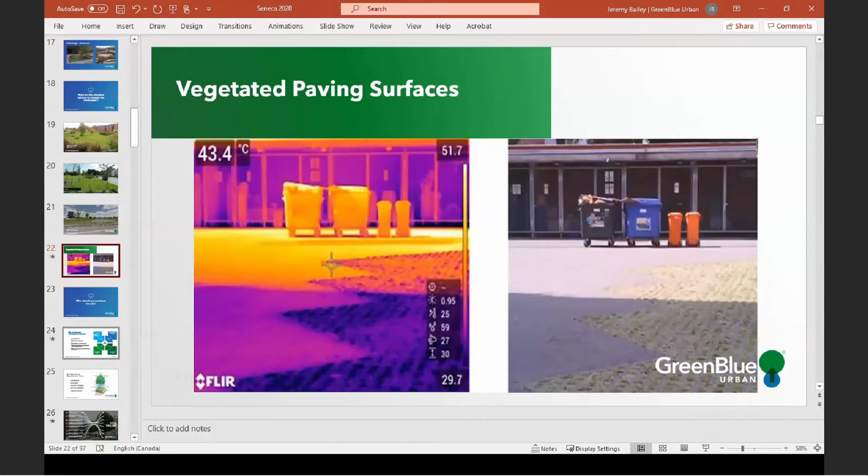Now, people will ask me the question, why should we use a tree for low-impact development, for LID? What does this actually mean? We actually bring it into the 4 pillars. We look at what those pillars actually mean. So we look at water quantity, the investment of it, how we control it, and how we control runoff.

We look at water quality. We look at how we can reduce pollution and volumes. We look at amenity space, how we create and sustain better places for people. That's us. We look at biodiversity, creating and sustaining better places for ourselves and nature. And somebody told me once, as we look after nature, we look after ourselves.

And this is critical. So we start understanding really what a tree can do for us. We look at it as what we call a high-performance tree. Now, the tree in itself might have the benefits of transpiration, canopy interception, reduced throughfall, increased infiltration, phytoremediation. There's all these different benefits that come along with the tree in itself. But we want to look outside of that scope and really understand what it does for us.

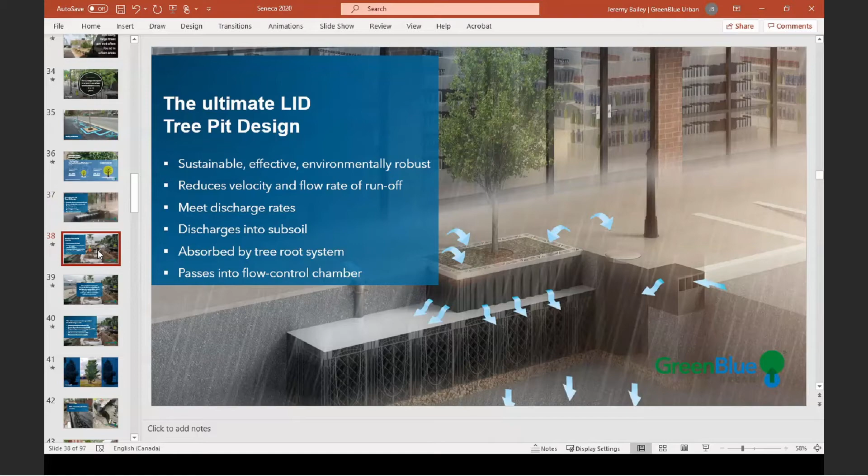Now I want to show you a simple project done well over 10 years ago that actually spearheaded the design of these systems. This is a project at Dundee University in the UK, called SuDS - Sustainable Urban Drainage within a tree pit. We're going to take a fairly small soil volume, just over 13 cubic meters, for this tree.

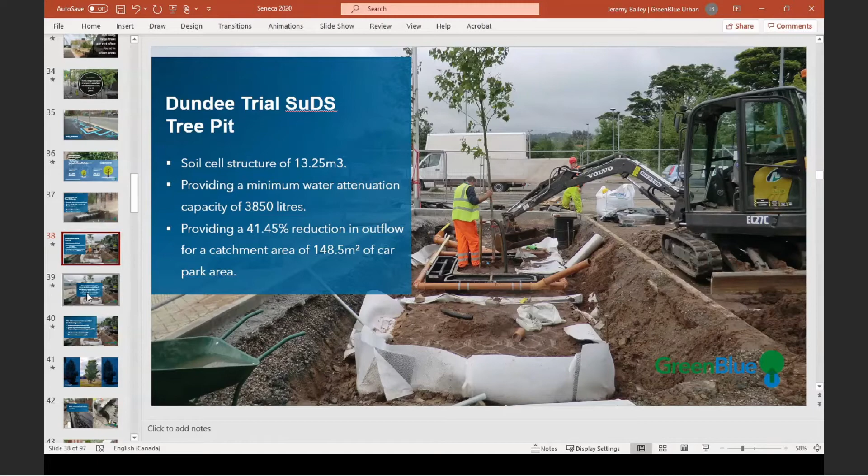Now let's jump ahead and look at some of the values. The results measured a demonstrated reduction in outflow of 88%, with a lag time of 45 minutes between inflow and initial outflow. So if we have a rainfall event at 2 o'clock, it wasn't until 45 minutes later that water came out the base of this. We can reduce the buffer, reduce the pressure and loading on our storm sewers and sewage treatment plants.

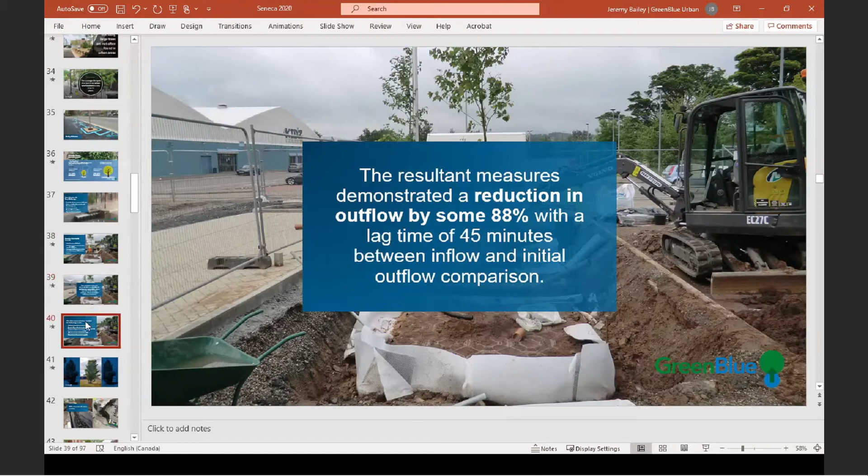Then look at the other values that come along with this. Total suspended solids - the waste we see on the top surface - was reduced by 50%, meaning less pollution going into the storm sewer. Phosphate, zinc, and lead were reduced by 70%. Nitrogen and copper were reduced by approximately 50%, and so on - so we're reducing hydrocarbons as well within this space.

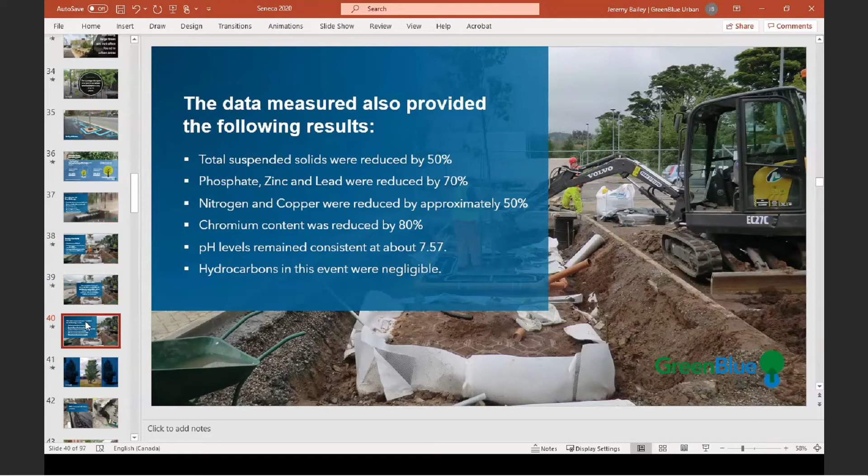Now what I'd really like to show you is what the tree looks like 10 years later. Here's our tree in the same space, performing as a high-performance tree - reducing stormwater, reducing loading on the storm system, and increasing its value as a high-performance tree.

It's providing shade, it's providing value, it's providing amenity space, and it's growing as a living asset in our space. So what I'd like to also do is help you understand how we could design some of these spaces.

I'd like to go through a simple project where we remove microplastics. Below ground, we put in an infrastructure system supporting root growth, what we classify as a soil cell, and ran the water through it. 98% removal of plastics happened on this project. Now here we have the actual project from the surface.

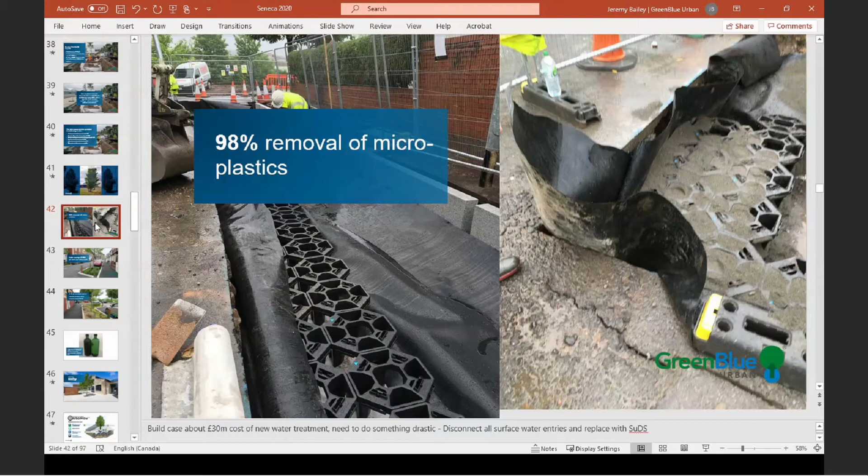People say to me, oh Jeremy, you're saving the whales, you're saving the oceans. Yes, we are. We're reducing plastic, we're reducing microplastics, but we're also creating spaces above ground for healthy habitat of pedestrians and animals. On top of this, the water savings for this city was over $750,000 per year in pumping costs, from the reduced loading on the storm sewer.

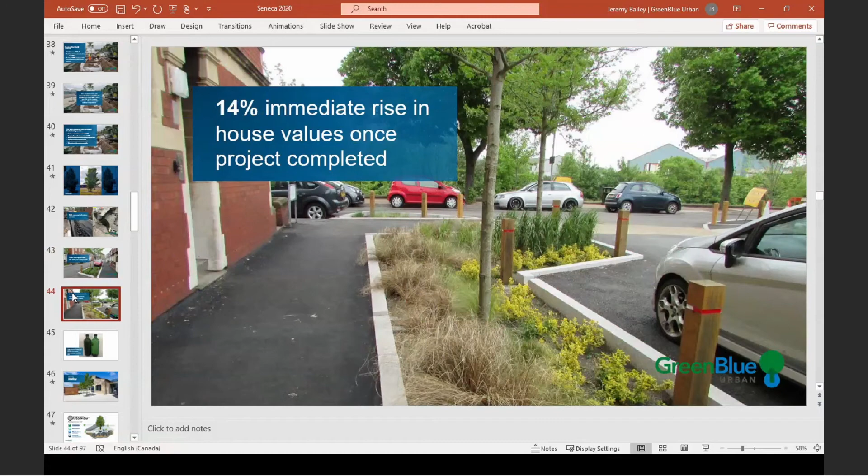Now we look at the value here as well, and we got a 14% immediate rise in house values once the project was completed. So there's a balance to the owners, the pedestrians, and the actual economy within that space. When we revitalize a streetscape and put in green infrastructure as well as blue infrastructure, we get increased residential house prices.

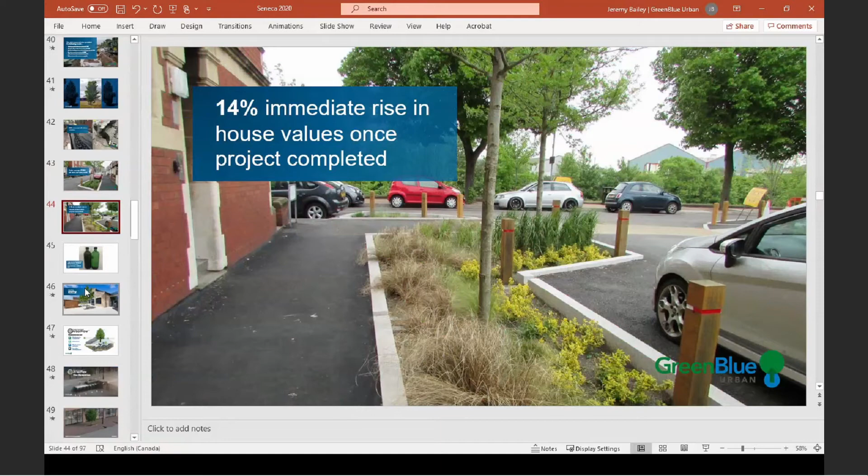Now just looking forward, this isn't just about residential. Here's a very simplistic project. We can see there are 3 trees in front of this building, and around the squares below the tree we can see some gray area, especially in the first tree there - that's what we classify as a linear drain. What we're doing is sloping the direction of the surface into the tree planting zone to allow for stormwater infiltration.

What we can't see here is what's actually happening below ground. Below ground we have a full infrastructure system supporting the growth of these trees, but also reducing stormwater runoff. This is called the ArborFlow system for managing stormwater runoff. Step 1, the water flows into the storm inlet, which can come in different configurations. Step 2, the debris is filtered out - that could be total suspended solids as well as larger debris. Step 3, the water flows through the system and is vented. Step 4, the water enters the system and percolates into the root system.

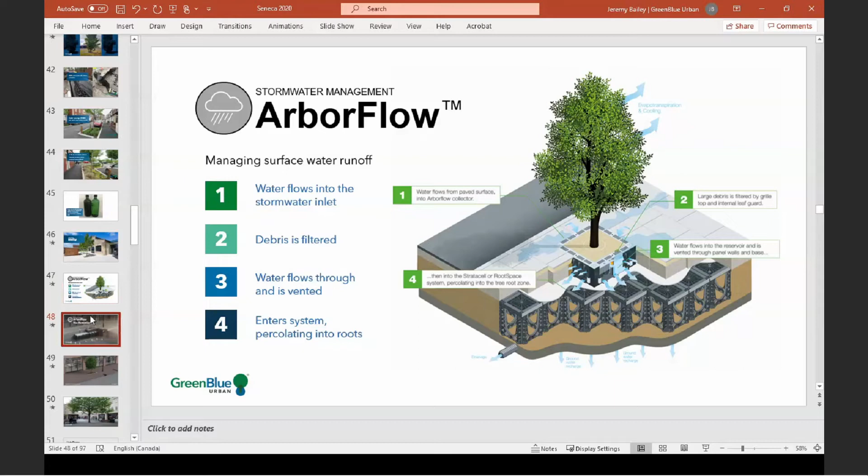Now I'd like to show you how this actually works below ground. Let me just see if this slideshow works here. Okay, I'll do it verbally instead of the video. So what we have here is a permeable surface.

You can see it's raining in this application. We've done a cutaway of the RootSpace system below ground, so there are different ways of bringing stormwater in. Number 1, we can bring it in through a pervious surface, which is great for infiltrating and maximizing stormwater exactly where the rain falls. Number 2, we can use a linear drain on the back of the curb around the tree planting zone to allow infiltration within those same zones. Number 3, we can bring it in from a curb inlet, which is becoming very popular in these spaces. Or number 4, we could bring it in through an area drain and infiltrate into the tree planting zone. The key thing is we provide the infrastructure below ground to create this sustainable environment.

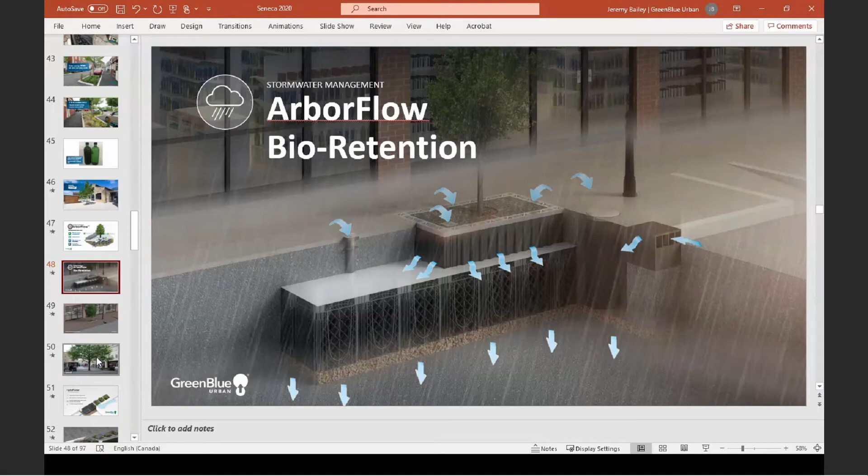So moving forward, we can also use other aspects. I don't want to just highlight trees. We can also use something like hydroplanters or rain gardens. We're actually infiltrating at ground level.

Now we talk about the application of diversity, recycled content, and the right tree in the right place. But we want to also understand how we use the application of recycled components, making sure we're using them in the right way, and being able to remove millions and millions of pounds of plastics from landfill sites and reuse them in green infrastructure and blue infrastructure applications as part of the circular economy of bringing these spaces together.

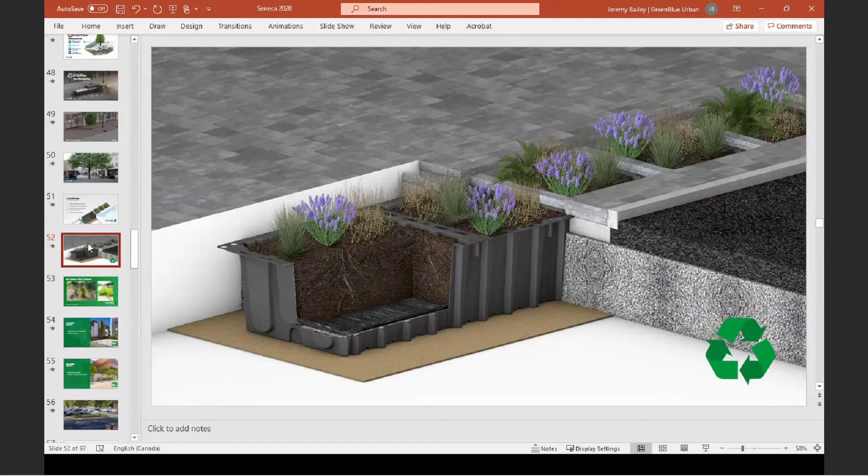So we want to understand when we create these spaces, are we using products like concrete that have very high carbon footprint? Are we looking at reducing carbon footprint? Are we looking at what sustainable infrastructure actually means?

Another way of doing this is actually through green wall systems. These have been used in the past. Of course, in our climate here in Ontario, green wall systems mostly function during the spring and summer and sometimes fall months, but not in the winter. So designing these is very key to the right green wall system in the right space.

But we can enhance the look of building facades, combat air pollution, reduce the heat island effect, and help offset buildings for carbon footprint.

So when we look at existing spaces, we can look at how we can make these same changes. This is a project here in Virginia. What we did here is we looked at their parking spaces and how we could create some sustainable designs with tree planting.

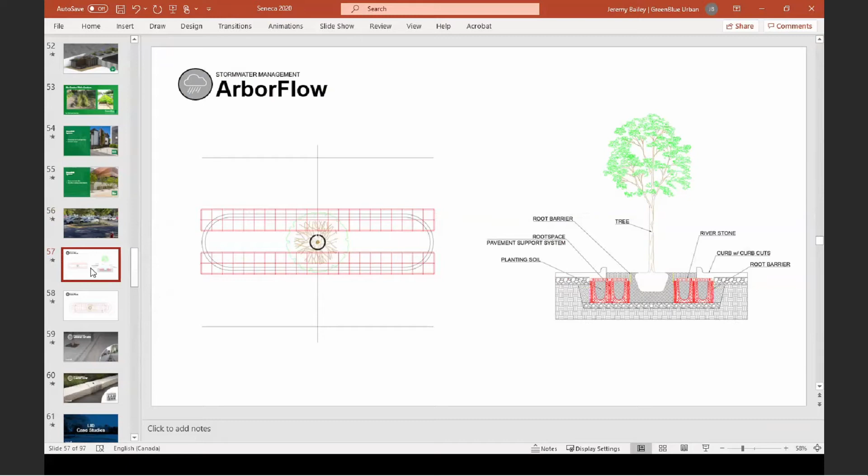Designing the system is very, very important, folks. I just want to highlight and reinforce that again. We want to make sure that when we create sustainable infrastructure and invest in it, it's working for years and years to come, not just for maybe the first 5 to 6 or 7 years. So designing a system is very critical - understanding the requirements, understanding what our vision is, and actually creating these spaces. That's what happened here at this project at the ASCE headquarters in Virginia.

So we also look at how we get water into the system. If anybody happens to walk down Front Street across from the Metro Center in Toronto, you'll see this linear drain, I think at the corner of Peter and Front. It's a fantastic way of bringing stormwater into the tree planting zone - a simple linear drain, easy to maintain, and very visually appealing.

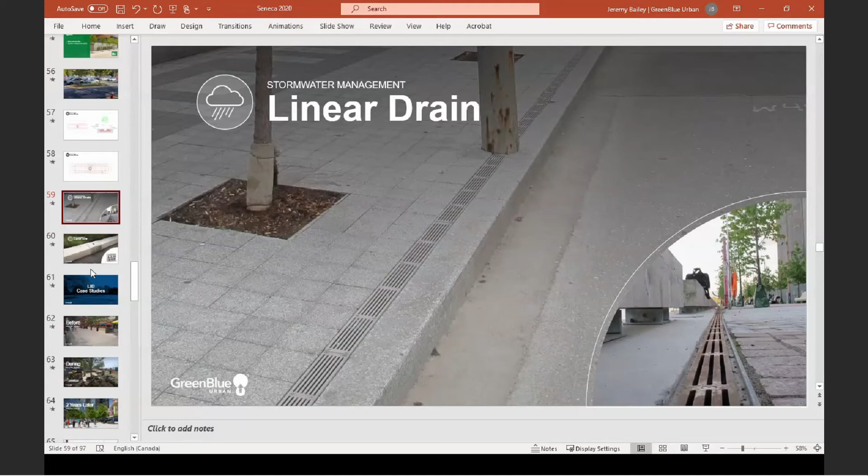Now, we're working with a company called James Corner Field Operations out of New York City. We redesigned the space, and here it is during construction. We provided underground assets to support canopy infrastructure and tree planting on this structural slab at the Navy Pier. This project is one of the first SITES project in North America - SITES being the new extension of LEED for landscape architecture.

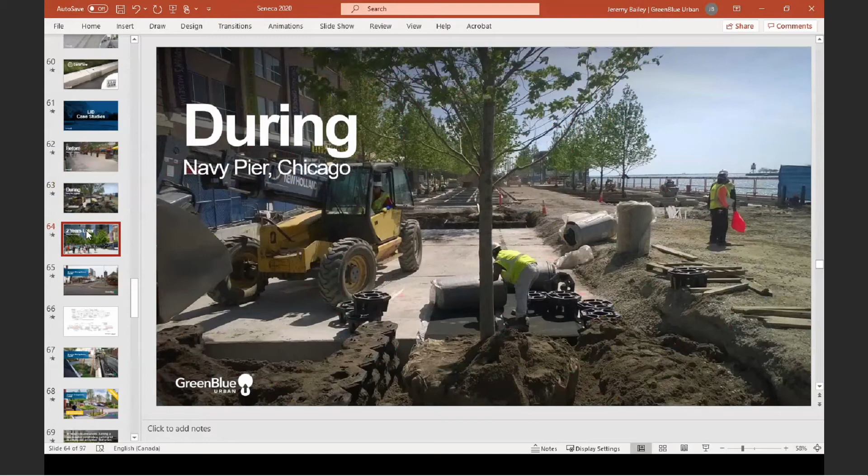One of them being that it wasn't a very hospitable green space. So what we did here is we redesigned this to meet the requirements of what the actual residents wanted. I want to highlight here, when we're creating spaces, it's always good to communicate, to speak with the surrounding residents and get an understanding of the challenges they face and what they foresee. Treat them, as we say, as grown-ups. So one of the things we did here, we did some door knocking, YouTube films, social media, and what we call street surgeries. We got opinions and options, and we engaged for their support, which was priceless information for creating a successful project.

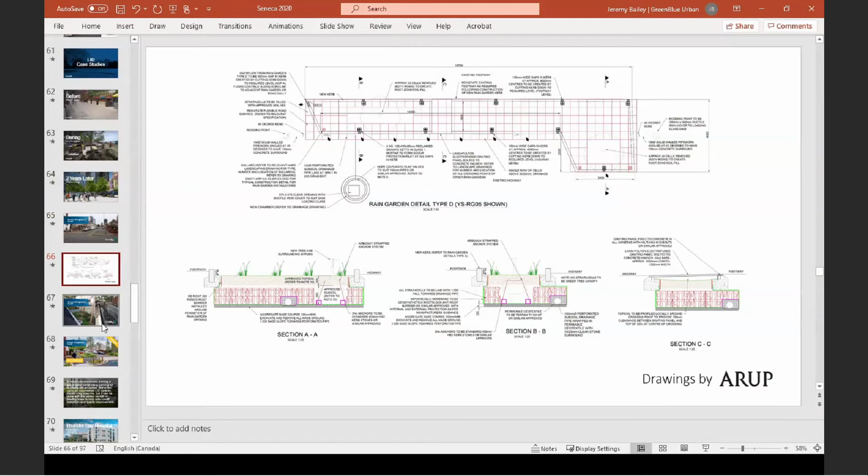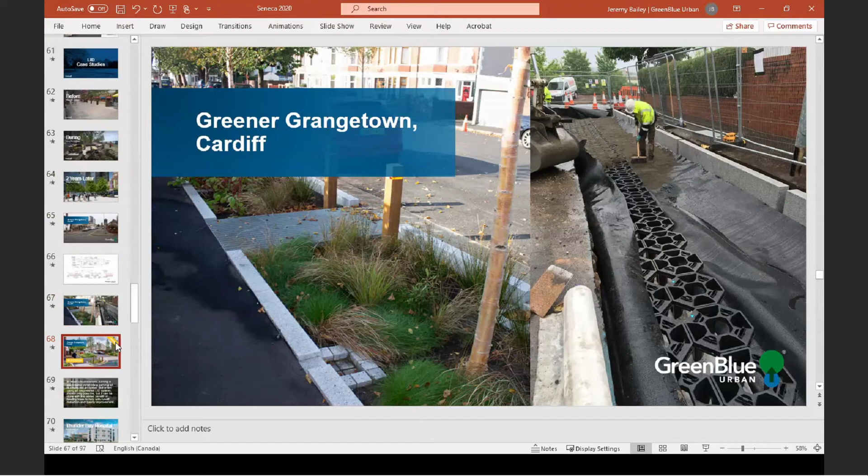So a very short period of time later, here we are at that same project in Greener Grangetown. And this is the same project that we are removing 98% of microplastics from the stormwater going through the system. Not only that, this project was an award-winning project for Retrofit Scheme of the Year 2020 SuDS Like Awards. And here it is. Isn't this a beautiful space? So if we take this vision and the little acorn that we saw in the first image at the beginning of this presentation, and we start implementing it and designing it and thinking about sustainability, we get projects like this. We're actually winning awards, but at the same time, we're benefiting the surrounding residents and spaces.

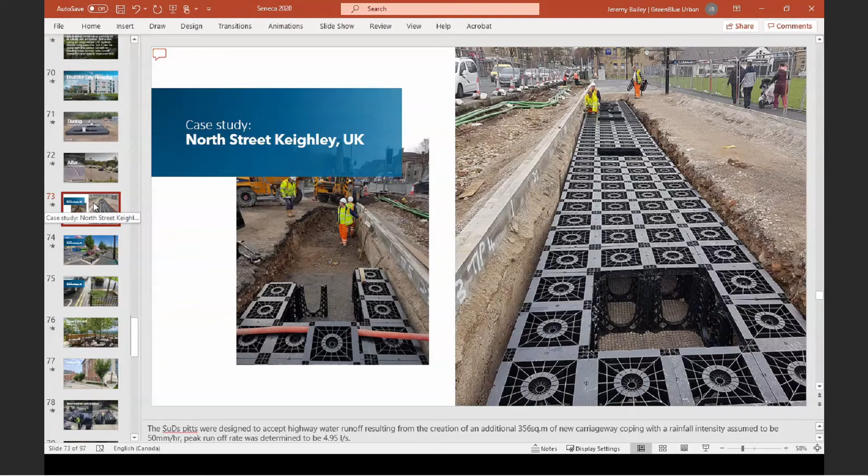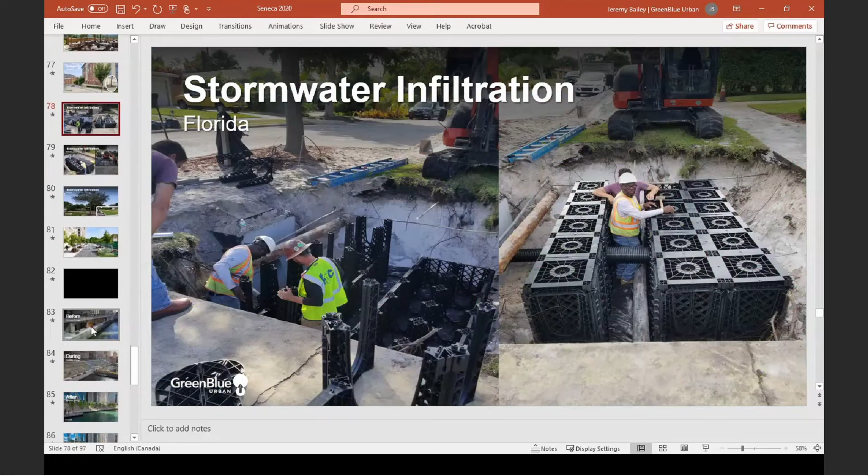This project was very high profile. It's on a structure as well. A lot of challenges here, but we invested in infrastructure below ground to create the space, and we also incorporated low impact development at the same time.

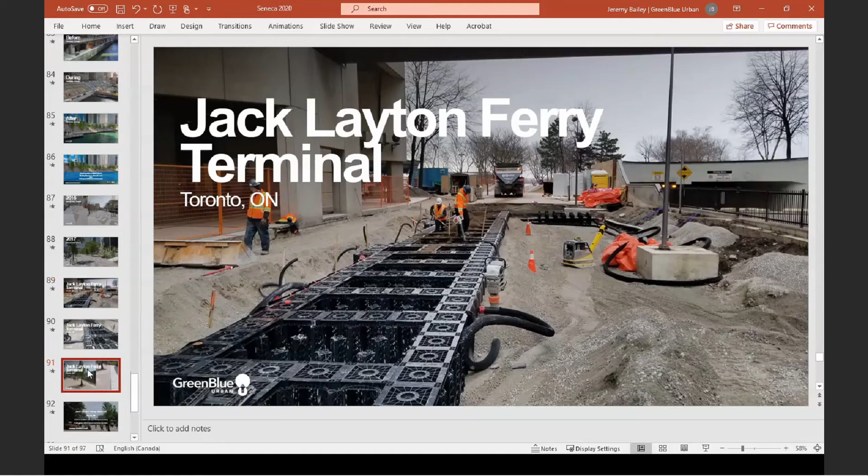So what we see here, if you're walking on top of this surface, all you'll see is the tree planting zones with these beautiful maple trees and this linear drain on both sides. It's an actual roadway, designed for a road, taking the stormwater and filtrating it below ground.

Now, what we don't know is the actual results of this project. So I'd like to highlight this here. If you're ever at the site, you can kind of, in your mind, put some numbers together.

At the Jack Layton Ferry Terminal, there are 19 trees to be planted. I believe the first 17 were already planted. They're in approximately 15,000 cubic feet, or 425 cubic meters, of rooting space, providing attenuation, holding the water like a sponge, over 25,000 gallons, or almost 100,000 liters, of stormwater. This is reducing almost 100% of the runoff from the space to be utilized within this zone.

Now just closing up here, and I know I've gone through a few of these slides very quickly, but I want us to remember something. We need to think about how we create space.